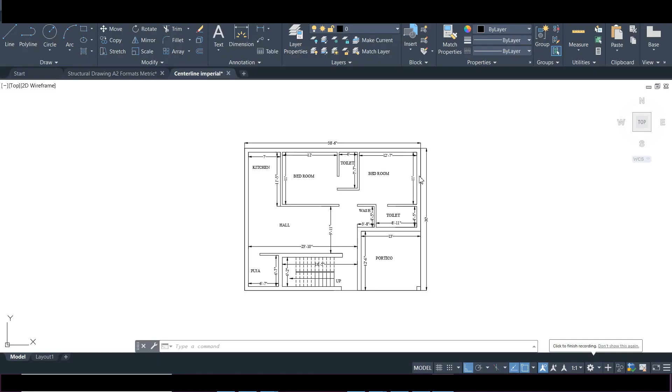In today's video we'll do the column positioning of a small building of 1150 square feet, and we'll also show you the process of making the DXF file and importing it into the Tekla Structural Designer software for making the structural drawing. So without wasting any time, let's get started.

First of all, if you want to know about the concepts of column positioning, you can check out the video on column positioning. I'll provide that link in the description, the first link.

So let's start placing the columns here. I'll take a 10 inch by 10 inch column because this is a 10-inch wall, so I've made a rectangle, 10 comma 10, and enter. Before that, I had put all this in a single layer, the zero layer. After making this rectangle, go H A, enter for the hatching, and give the hatch here - I'll take a solid hatch.

After taking this, I'll copy it to this point, and place it in the remaining points. This is 7 feet, but we'll consider this unit as one. Let's complete this unit and then think later. First, I'll place the obvious column placements, and then we'll slowly do the remaining things.

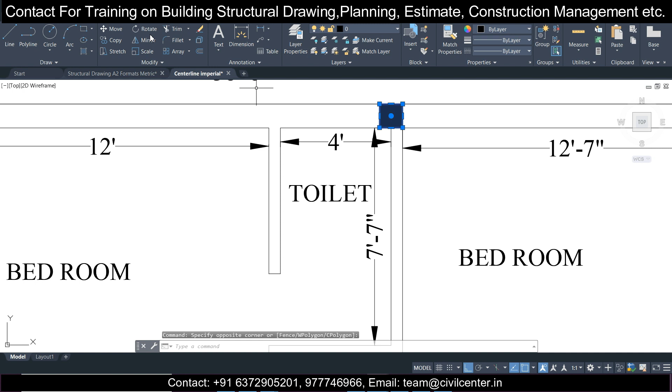I'll move this to this one point, 17 feet, and then we'll select all the columns like this, deselect this one, and make a rectangle to select all. Once this is done, I'll take the copy option and copy from here to here. So this should cover everything.

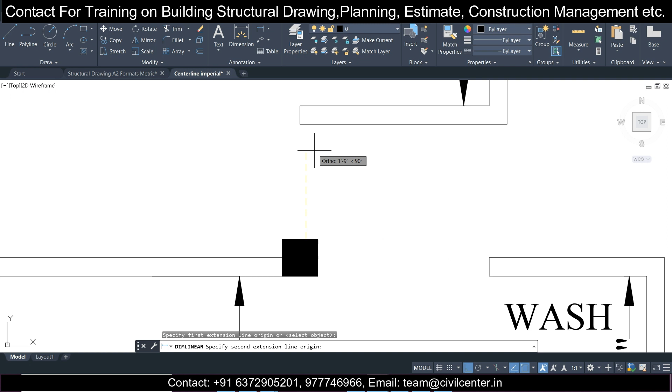Let me check my entrance space which is available for the bedroom - it's 1 feet 9 inch available for the bedroom here. I think we can do that. We can just reduce the size of the toilet in this part to accommodate it, so that shouldn't be an issue.

So this part is done. This top part - as you can see, if you can imagine the beams, if you're experienced enough, it should take care of itself, all this.

So coming to the next part, let's see here - obviously we need one, and let's start from the bottom part. This is a different part here, and this is one part, so that's taken care of. This is the primary beam that will go here. So let's give a beam here, and a column here.

This is at the corner intersection, and we'll try to provide at least two columns for our staircase portion. This will join here and this will join here. So we're thinking we'll provide a column here, like a parallel column to this one. This one will obviously be there.

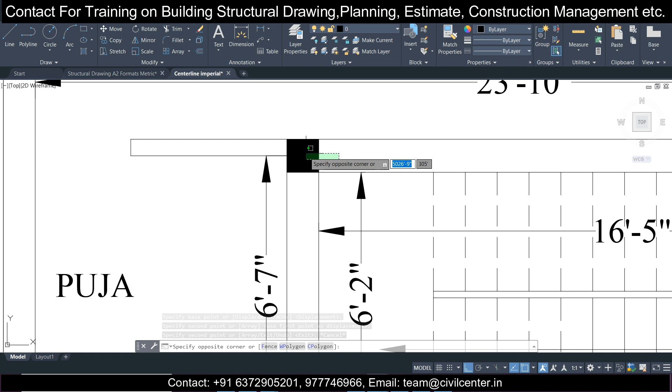Copy. So let's see how it is coming. Okay, it's coming along this line. So another column we can give here, and another column let's give here. So there will be 3 columns for this particular staircase. Copy and place it like this.

So this beam can go like this, secondary at this point, pinned at this point, and the remaining are primary beams. So the design will pretty much hold itself. We can join these primary beams if you want, and here if you want you can give another conceal beam in the top floor. So I hope this can hold itself, and this is the arrangement of the column positions which has been done in this plan. So I hope this is it.

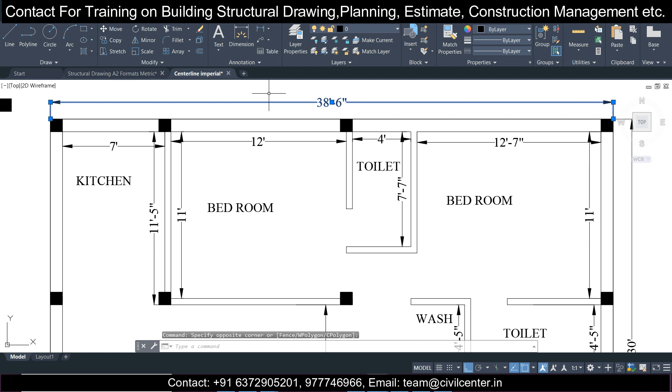So let's make the center line pretty quickly. First of all, we don't need these dimensions at all now. So we'll select the dimensions here and right click on this and select similar. So we can delete this, and this text also we don't need, these texts.

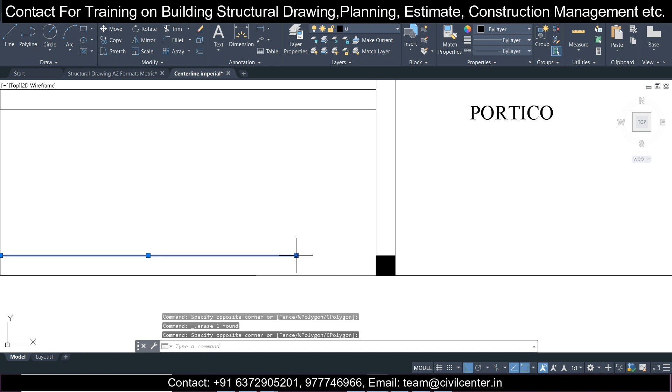So we can select that and delete them, and I think we can select this and extend this a bit just to demarcate the positions of your beams. So this much is okay, and we can go here and extend this also, this particular line also we can extend, and after that we can demarcate here for the staircase like this. Turn off the ortho, give a cross here and a cross here, and after that this will denote the staircase. So select this and right click, select similar and delete, and then delete this.

So this is our column positions which has been ready. So now what we'll do, we'll just save this, Ctrl+S, and we'll do the line here, take a line from here, say, and turn on the ortho, vertical lines, select this.

So select this, select the copy option, and copy from here to here to here to here, like this. We can copy and select this, select this from here to here, and then select this, copy, move this to here.

And this we can do later, I think, and a separate point for that. So this is done, and this one is remaining. So select this and copy. I think we can take any point like this, and here you can place it at the center like this, and okay, one is missing, so copy, this will be it.

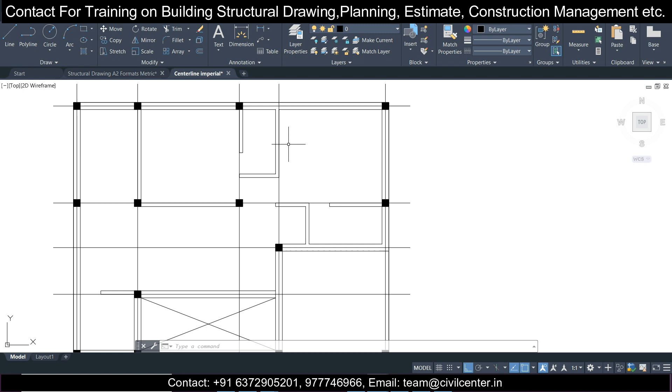And now the primary beams are done, most of them, and okay, one is missing still, copy. Now let's check. Okay, the primary beams column to column are done. If there will be some secondary beams which will be missing, let's do it for them as well. Why to leave them? Select this, copy, and provide this beam here, and we can provide a beam here as well for this. Let's provide it on the inside so that it will be in the toilet portion. So I think this is pretty much the beam arrangement.

We have covered everything. So we'll press Ctrl plus S for now, then we'll go to layer properties and we'll create a new layer. Not this one, this is the new layer option. You can also press Alt plus N.

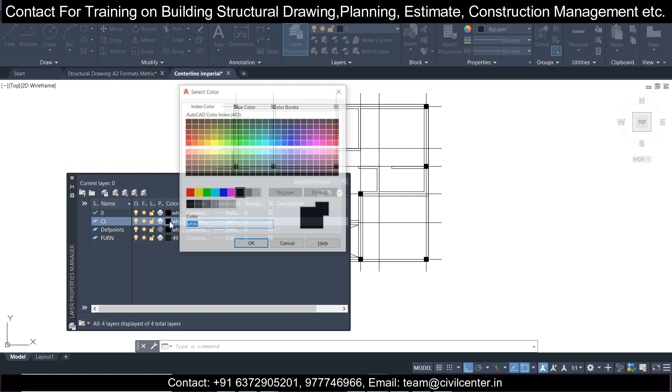First of all I want to rename the layer, so rename it as CL or center line. Color, I want to keep a color which will be visible in Tekla, I'll prefer blue. And the line type, I'll not interfere with the line type here, because automatically in Tekla you can change the line type, so I'm not changing the line type here. Select this and go for the center line. So after going for this center line, just press Ctrl plus S.

So this is saved, and after this is saved we'll open a new file, a new project. In the new project we'll press F7 first to turn off the grids, and this time we'll set the units to mm. So we'll do UN, enter, set the required precision to 0.00 for mm, and OK. Then go to annotate, and let me define the text size as well.

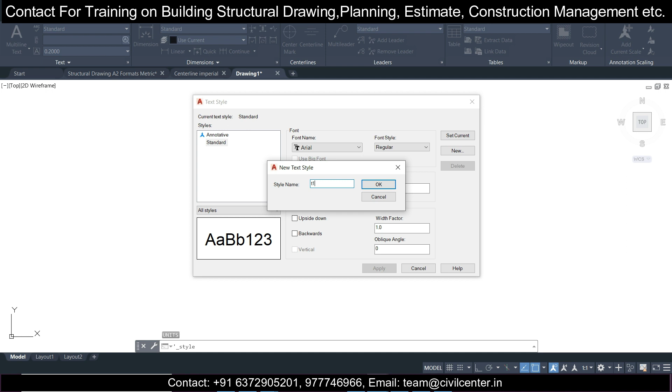Let's define a new text style, T100. By default, if it's 150 height, that's 1.5 mm, so do 150 for 100 scale, apply, and set current. Then go to dimensions, also new, and we'll do D100, and continue with it.

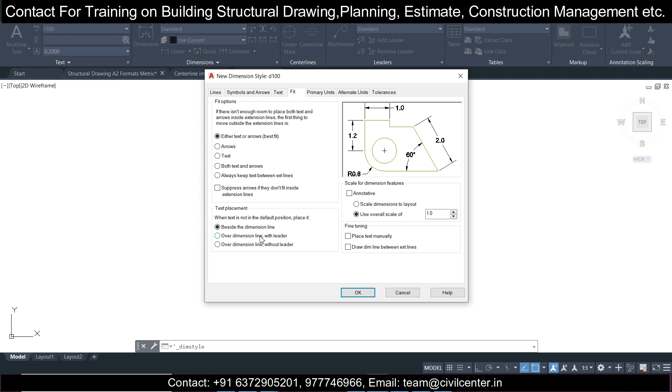First go to primary units, decimal 0.00, the same which is selected, then go to fit and select this option, text, and select T100. Only the arrow size we now need to change, arrow size same as text height, 150. These settings I do despite not being needed, because this sets a good habit for setting up the text file.

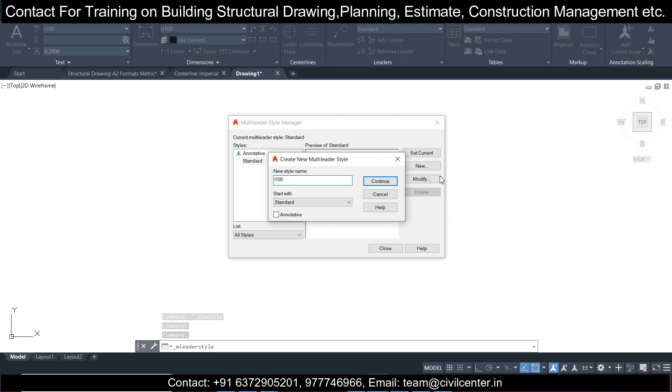So I'll do L100 here and continue. First, go to the content and make this T100. This is done, leader structure and all this doesn't need to be changed. On the size, make this 150, set current, and close.

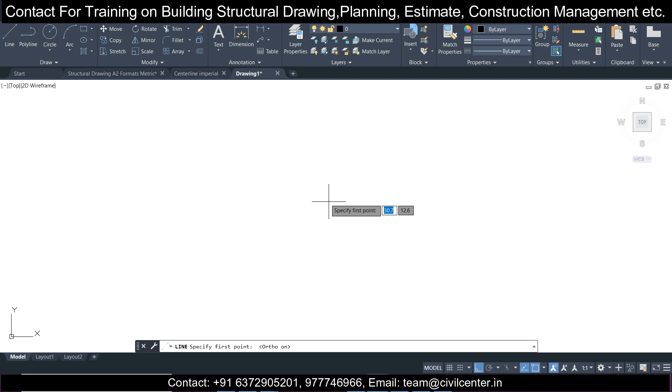After doing the settings, I'll make a line here. For making a line, turn on ortho. 10 inches equals to, convert it, 1 inch equals 25.4 mm, so 10 inches equals 254 mm. I'll draw a line of 254, enter, and here I can check the dimensions also.

This and this, 254 is the dimension here. So just click on this imperial file, or the file in feet and inches. We'll copy this, and after copying we'll place it here, and this should be done.

Select this, we'll select AL, enter, select this, this is a 10-inch column, so we'll align it according to that. First point, then second point, then your second point. Press space, scale object based on alignment point, yes. So the object is scaled.

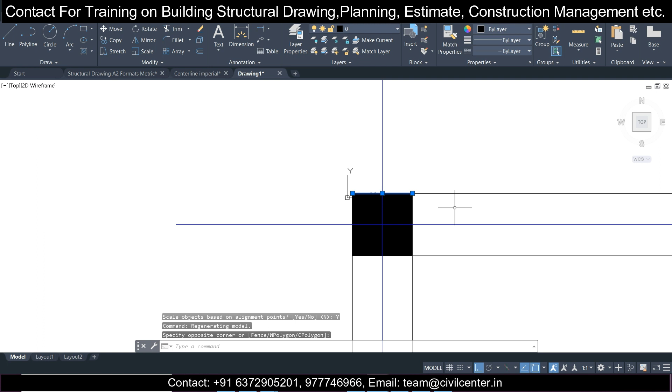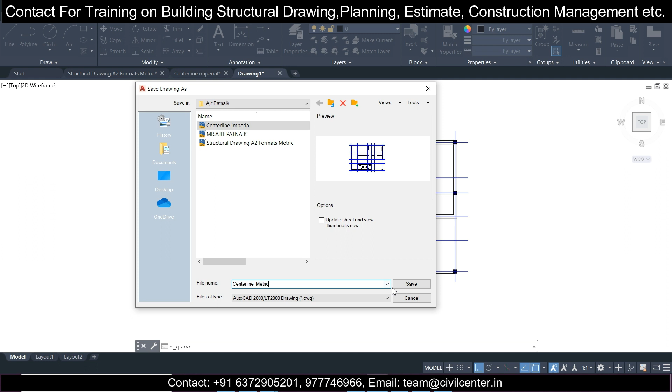Now the extra line, we'll go and delete this. So the object has been scaled, and the DWG file has been prepared. So save the DWG file first, and we'll save this as center line imperial, and now we'll go center line metric, and save this. Now let's create the DXF file.

So we'll go DXF out, creating the DXF file, and we'll go DXF only. So here we'll save this, and right now we can open Tekla and check.

So I have opened a new file in Tekla. I will not go by default through the steps of creating construction levels and all. I'll simply check whether this center line can be imported or not. For that, you go to construction models, and then you can import this DXF here, let's check for this particular file.

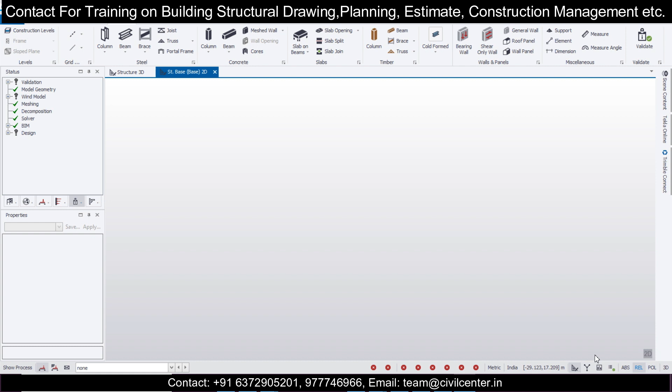So I'll go to my location, desktop, and this DXF file, and click open. First of all I need the center line and architectural grids, then next, then ByLayer, finish. So grids are fine, click escape, and the grids are imported nicely.

After that, just import DXF, select this DXF file, and again import, this time we don't want the center line, only the shadow we want, and the unit which we have made. Then click finish and zoom in. So as you can see here in Tekla, the center line has been imported successfully.

So like this you can make the center line in Tekla.